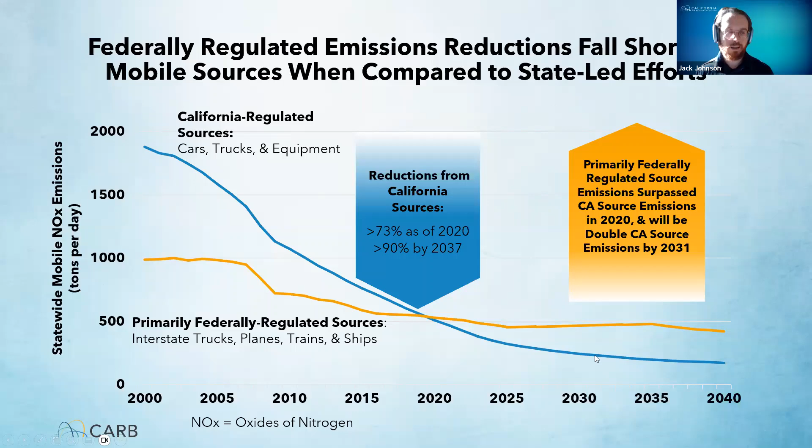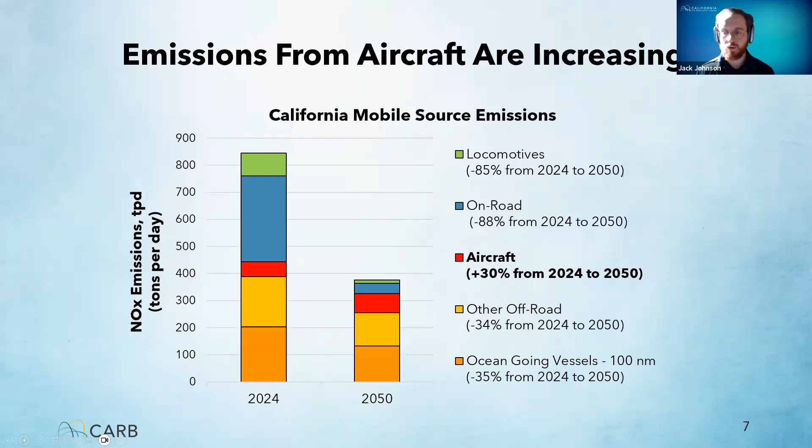The projected increase in emissions from aircraft is concerning, especially considering the NOx emission reductions needed to meet the targets outlined in the 2022 state SIP strategy. In the SIP, it's estimated that an 80% reduction in aviation emissions is needed to meet the 2015 ozone standards. This reduction in the South Coast Air Basin could solely be achieved by reducing commercial aircraft emissions, which make up approximately 90% of all aircraft NOx emissions there. This trend, both statewide and for the South Coast specifically, shows how there is a huge potential to reduce NOx emissions from commercial aircraft alone.

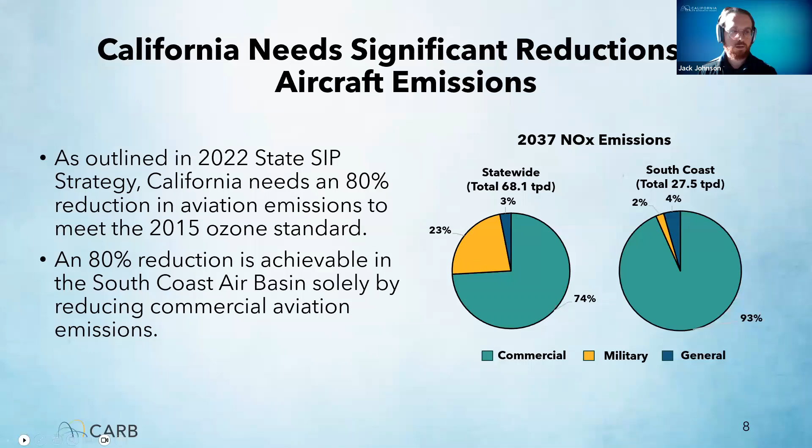CARB's 2022 scoping plan has also set aggressive emissions targets to achieve carbon neutrality for aircraft. Through the scoping plan, 20% of aviation fuel demand will need to be met either through electricity or hydrogen by 2045, with the remaining 80% met by sustainable aviation fuel, or SAF. These targets for the aviation sector will be crucial in reaching California's goal of carbon neutrality by 2045.

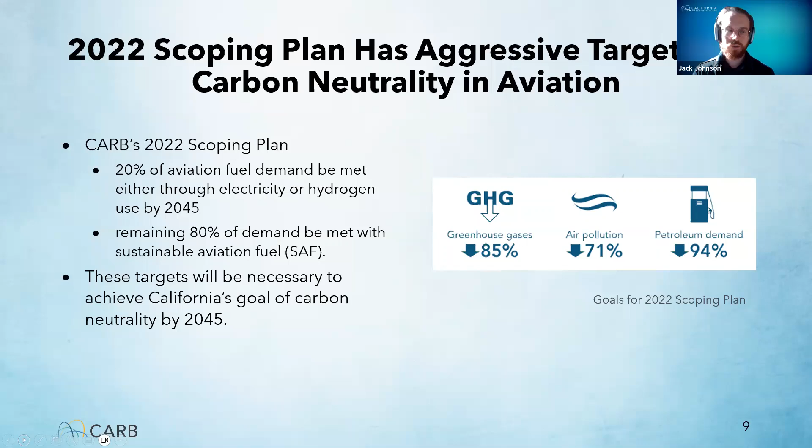There are many reasons why emissions reductions are important, with the most prominent being the health impacts of jet fuel to passengers, pilots, airport and ground support workers, as well as communities that live close to airports. Poor air quality has been linked to many health conditions, including decreased lung function, asthma, other respiratory illnesses, and premature death. These health impacts are caused both by burned and unburned jet fuel. A study done in 2021 by the National Research Center for the Working Environment in Denmark showed that jet engine emissions have similar physical and chemical properties, as well as health effects, to diesel particulate matter.

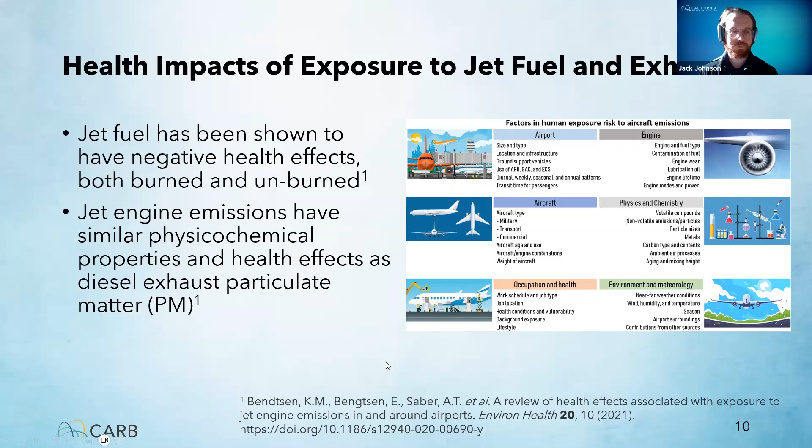Jet fuel emissions have been shown to affect the health of airport workers and nearby communities. A white paper released by SEIU in 2024 showed that airport workers can be exposed to particulate matter concentrations 6 to 9 times higher than concentrations measured on busy streets. Because of these negative health outcomes, airport worker unions have been strong advocates for emissions reductions in the aircraft sector.

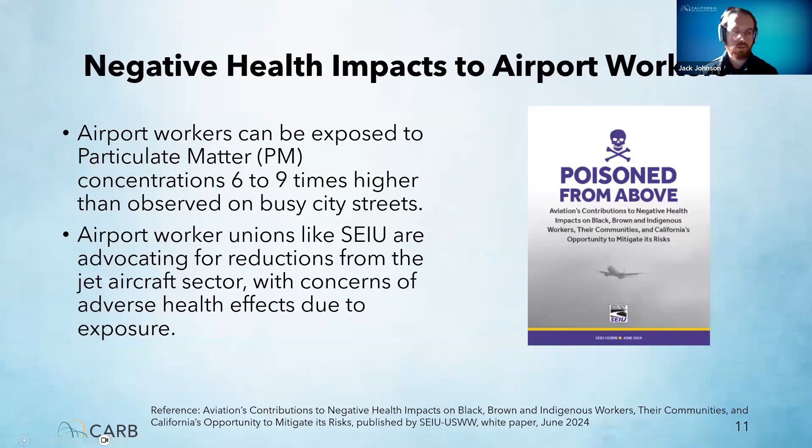In addition to high exposure levels in airport workers, a monitoring study conducted by USC in 2014 showed that particle number concentrations are 4 times higher, even 10 kilometers downwind of Los Angeles International Airport. Communities closer to the airport had measured particle concentrations as high as 8 times above background levels.

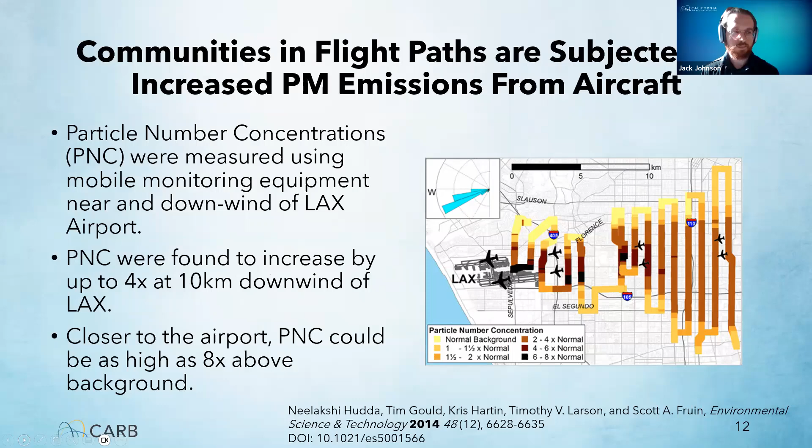Leaded aviation gasoline, or avgas, has also been a concern in recent years due to the potential for exposure to lead emissions. A recent endangerment finding from the EPA found increased concentrations of lead in children's blood who lived near airports, particularly those with higher general aviation activity. While leaded avgas is typically not used in commercial operations, it is still an air pollutant of concern from aviation.

In response to some of these findings, Senate Bill SB 1193 was passed in California to ban the sale and distribution of leaded avgas in California by 2031. Currently, there are 14 airports in California that offer the 94 octane unleaded avgas. However, only about 30% of general aviation activity can use the lower 94 octane fuel in their engines. There are now 2 airports in California offering 100 octane unleaded avgas, and this will cover the remaining 70% of general aviation activity in California.

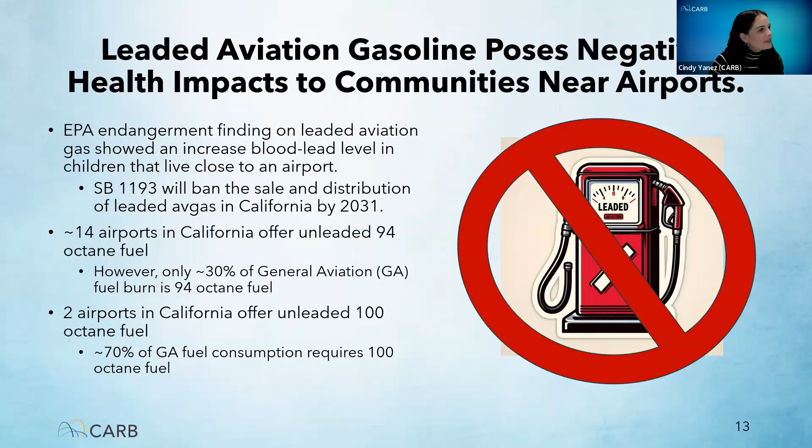The first standards were adopted in 1981 and included engine emission standards for NOx, CO, hydrocarbons, and smoke. Since then, the NOx standard was tightened four times, in 1992, 1998, 2004, and 2011, by 12 to 20% relative to the previous standard. In 2017, CAEP adopted the first emission standard for greenhouse gases, and in 2019 they established new emission standards for non-volatile PM.

While ICAO sets an international standard, US EPA is responsible for setting aircraft emission standards domestically. US EPA has authority to set stricter standards than ICAO, but traditionally harmonizes with the federal standards with ICAO. These emission standards are set under a technology-following approach rather than a technology-forcing approach. This means the standards can be met with technology that's already in use.

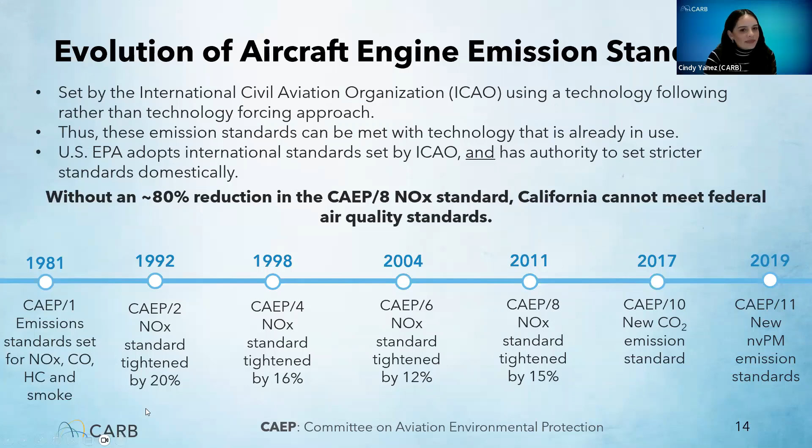The federal government has initiated some programs to help advance new aircraft technologies. FAA organized a cost-sharing program called the Continuous Lower Energy Emissions and Noise Program, or CLEEN, which aims to accelerate the maturation of new aircraft technologies. The program provides one-to-one cost matching with aviation industry companies who develop technology that reduces noise, fuel burn, or emissions below the CAEP standards. The goal is to incentivize development of new aircraft or engine technologies and alternative jet fuels that manufacturers may not have taken on otherwise.

In the current phase of the program, CLEEN 3, the goals are to reduce fuel burn by 20% relative to the CAEP 10 standard, NOx emissions by 70% relative to the latest standard, and non-volatile PM emissions lower than the CAEP 11 standard. The CLEEN 3 projects are ongoing right now until 2026, and the program targets to get these technologies into service by 2031. Several technologies from previous phases, CLEEN 1 and CLEEN 2, are already commercially available and in service today.

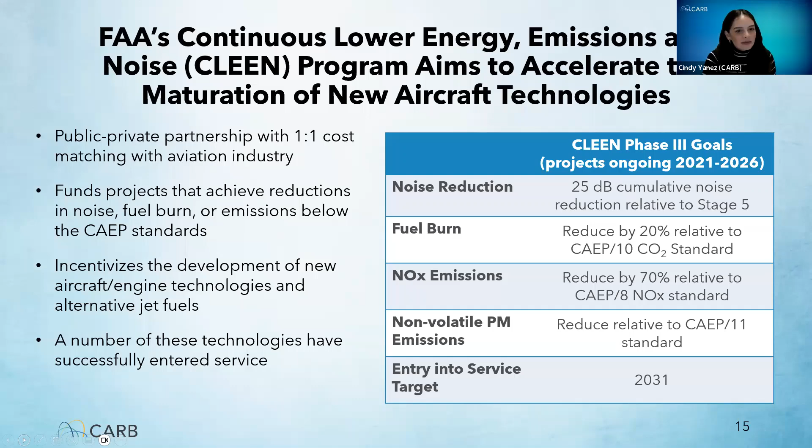A good example of a successful technology that came out of the CLEEN program is the twin annular premixing swirler, known as TAPS, which is a lean burn combustor developed by General Electric through CLEEN. Lean burn technology limits the conditions under which NOx is formed by lowering combustion temperatures, since NOx primarily forms under high temperatures, and by promoting a more thorough mixture of air and fuel before combustion through a swirling mechanism.

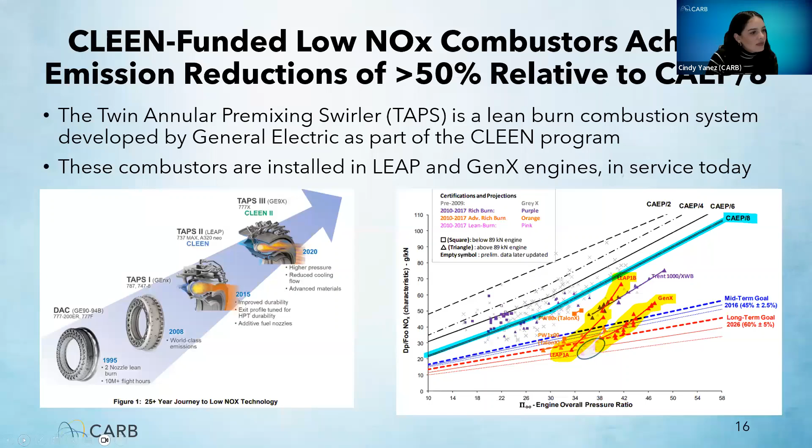This slow advancement toward lower NOx engines is also related to the trade-off between NOx emissions with fuel efficiency and also with noise mitigation. Simultaneous efforts for all three of those have resulted in a nearly flat trend for NOx. Although the NOx standard was tightened four times since the 1980s, this likely just prevented an increase in NOx emissions from fuel and noise reduction efforts over that time, but it did not reduce NOx.

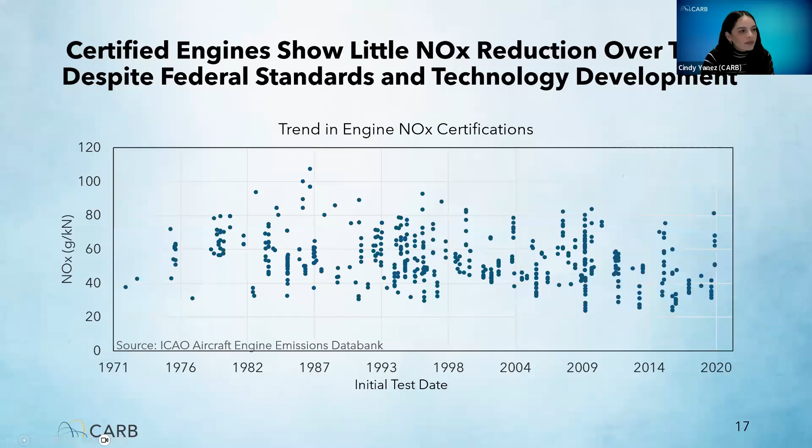Much of the aviation industry's current environmental efforts right now are focused on achieving net zero carbon targets by 2050. Plans to reach net zero rely heavily on the deployment of sustainable aviation fuel, or SAF, which significantly reduces CO2 emissions on a life cycle basis.

Just recently, CARB signed an MOU agreement with Airlines for America to further increase SAF use in the state. This MOU sets a target of working with the aviation industry to have 200 million gallons of SAF available in California by the year 2035.

While this target is a 10-fold increase over last year's volume, this amount is still less than 5% of the state's total jet fuel consumption. It is about 40% of jet fuel consumption for flights within California, but when accounting for interstate and international flights, this is still less than 5%.

Far more SAF is going to be needed for the aviation industry to meet the net zero carbon goals. Also, while SAF has significant benefits in reducing greenhouse gas and PM emissions, it does not reduce emissions of NOx or toxics, which are of high concern for air quality. Therefore, not only is more SAF needed, but more actions beyond just increasing SAF are needed.

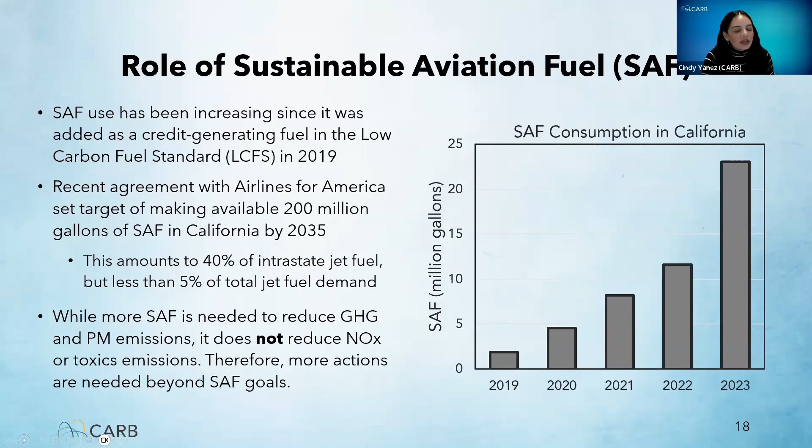Next. Air districts can establish local incentive and voluntary programs such as the MOU between South Coast and their five largest commercial airports. Air districts also have authority to create an indirect source rule for airports. On CARB's side, we can leverage our authority to establish statewide rules for operational practices, create incentive programs, and set emission reduction targets.

At the federal level, US EPA and the FAA are responsible for advocating and or setting tighter emission standards for aircraft engines, funding technology advancement through programs like CLEEN, and regulating safety, routes, and service. At the international level, ICAO's role is to set tighter international engine emission standards.

And then moving forward, airports can also take some action through their air quality improvement plans, infrastructure planning, and incorporating environmental initiatives into their lease agreements with their tenants, and by implementing local policies, for example, landing fees or curfews. And then next, the airlines could prioritize air quality in their operations and engage in opportunities to advance technologies and or operational practices.

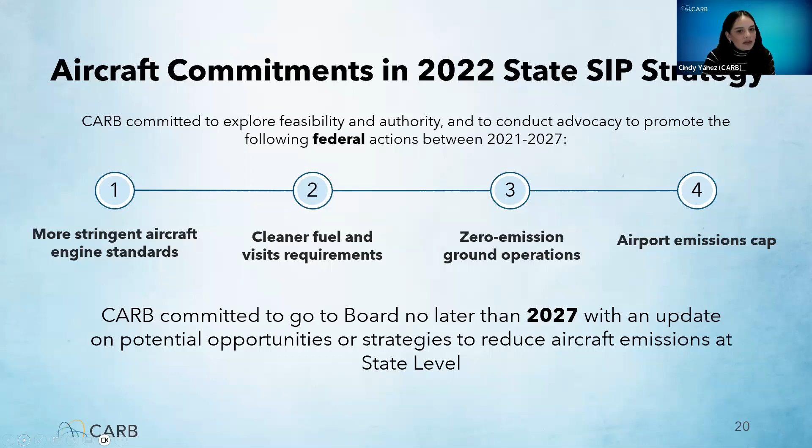As part of our efforts, we're conducting careful, in-depth analysis of our legal authority to promulgate rulemaking on emissions associated with aviation. Here we listed a few of CARB's responsibilities under the Health and Safety Code. First, CARB is directed to control criteria air pollutants from mobile sources to attain air quality standards. We're also responsible for reducing greenhouse gases to specific levels to combat climate change. The Health and Safety Code also permits CARB to assess fees to cover costs of compliance of off-road mobile sources. We will be cognizant of potential federal preemption issues throughout the rulemaking, and our legal team is carefully reviewing any possible limitations.

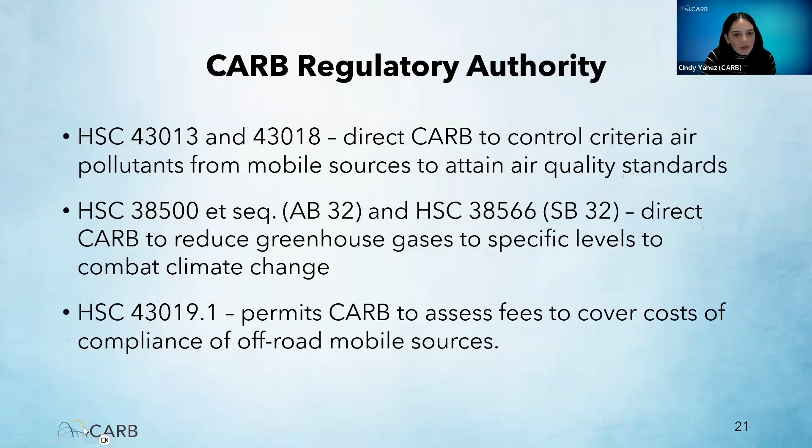Now I will pass it over to my colleague, Dr. Ramin Tohidi, so he will discuss more on existing state actions.

Thank you, Cindy. California has set key regulations to reduce emissions at airports. The large spark ignition engine (LSI) rule, starting in 2009, required large fleets to meet emissions limits for cleaner air. The in-use off-road diesel rule requires fleets to reduce emissions by retiring, replacing, repowering, or retrofitting older diesel engines from 2024, phasing out older diesel engines and mandating renewable diesel. The zero-emission forklift regulation, starting in 2026, requires only zero-emission forklifts, phasing out older ones by 2028. The airport shuttle bus rule transitions shuttles to 100% zero emission by 2035.

For vehicles, the Advanced Clean Cars 2 rule ensures all new passenger cars are zero emissions by 2035. The Advanced Clean Trucks rule increases zero-emission truck sales, while the Advanced Clean Fleet rule phases in 100% zero-emission government and drayage fleets by 2035. Then we have the recent partnership with Airlines for America, which aims to make 200 million gallons of sustainable aviation fuel (SAF) available in California by 2035. Lastly, based on the scoping plan, by 2045, 20% of aviation must be zero emission, with sustainable aviation fuels supporting the rest. Next slide, please.

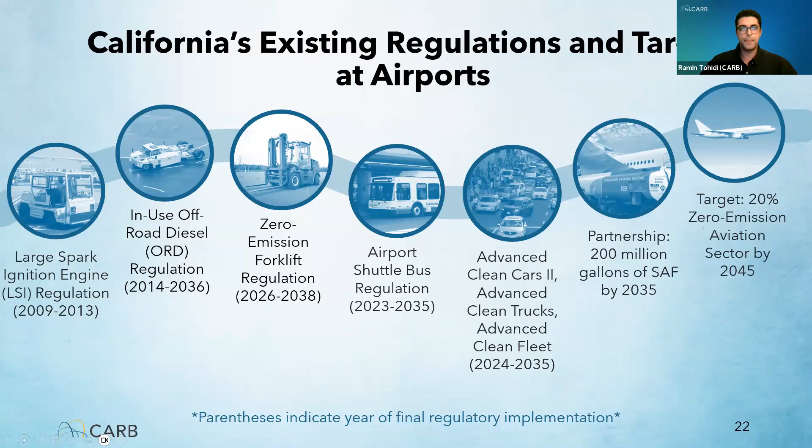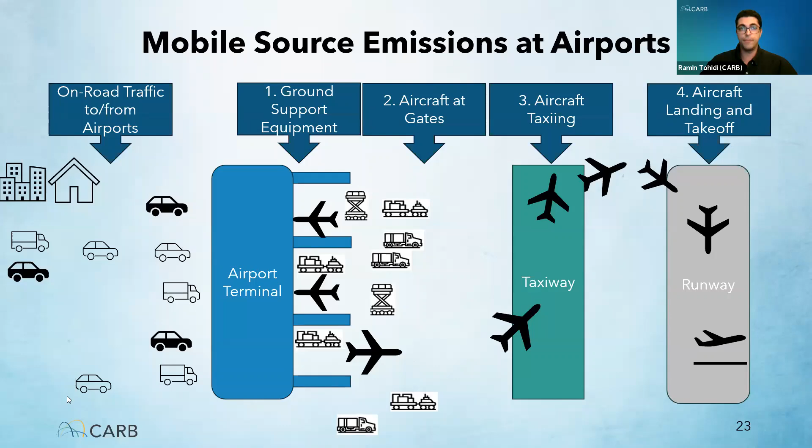This slide highlights the key sources of mobile emissions at airports. First, we have on-road traffic to and from the airport, including passenger cars, taxis, and shuttles. Inside the airport, ground support equipment like baggage tractors and fuel trucks contribute emissions near the terminal. Next are aircraft at gates, which emit while parked and using auxiliary power units (APUs). As aircraft move, emissions occur during taxiing on taxiways, and finally from landing and takeoff on runways. Each stage plays a role in overall airport emissions, and CARB is actively working to address emissions at every level. Next slide, please.

This slide focuses on NOx emissions at the airports and where they come from. First, on-road traffic like cars, shuttles, and taxis emit NOx through the combustion of gasoline, diesel, propane, and natural gas. Next, ground support equipment such as baggage tractors and fuel trucks adds to NOx emissions, specifically from older diesel powered machines. Aircraft at gates also contribute through auxiliary power units and idling jet engines, which emit NOx even when stationary. Finally, aircraft taxiing, landing, and takeoff are major NOx sources, with takeoff being particularly intense due to high fuel consumption. These stages highlight key areas where reducing NOx can have a big impact on air quality around airports. Next slide, please.

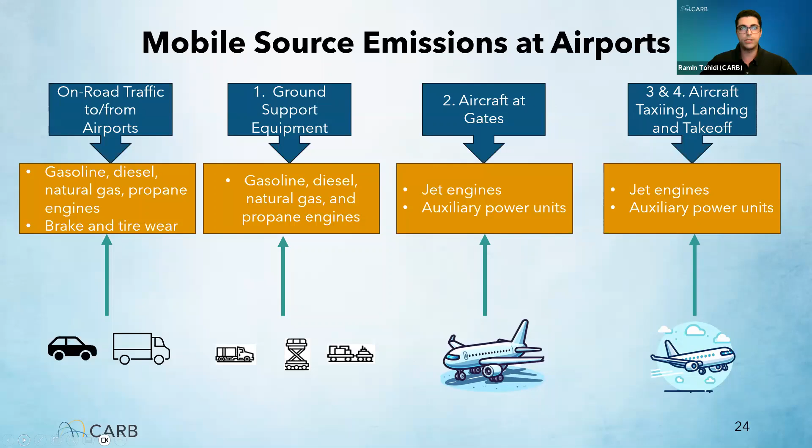This slide shows the contribution of mobile sources to NOx emissions at LAX in 2023. As you can see, aircraft are the dominant source, contributing 87% of the total NOx emissions. Breaking it down further, 81% of aircraft emissions occur during landing and takeoffs, staying within the nominal 3,000-foot mixing height, with 15% coming from taxiing and 4% from auxiliary power units. The remaining sources are on-road traffic, contributing 10%, and ground support equipment, which adds 3%. Next slide, please.

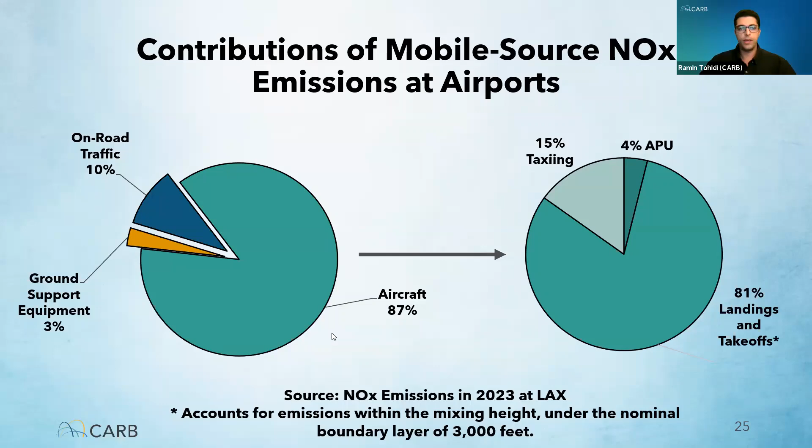How are these NOx emissions being addressed and regulated? For the 87% contributed by aircraft, there are no CARB regulations or technology forcing standards in place to directly control these emissions. The 10% from on-road traffic is targeted through regulations such as ACC2, ACT, ACF, and zero-emission shuttle bus rules, which aim to transition vehicles to zero-emission alternatives. And finally, the 3% from ground support equipment is partially regulated under the ORD and LSI rules.

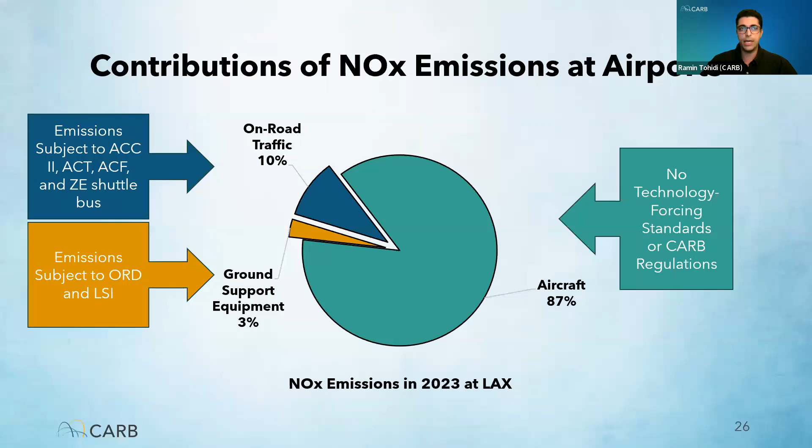The purpose of today's workshop is threefold. First, we'll introduce draft regulatory approach concepts, providing an overview of potential strategies for reducing emissions. Next, we'll outline planned updates to the emissions inventory, focusing specifically on aircraft and ground support equipment. And finally, we aim to collect your initial feedback on these concepts and explore possible alternatives.

As we present these concepts, we want to emphasize that these are just ideas and concepts at this stage. We don't have specifics yet. We are sharing these now to gather your thoughts and feedback. These are just concepts and ideas. We are here to explore possibilities and hear your reaction. We know there may be big questions about how these concepts would apply, and that's exactly the kind of input we are looking for today.

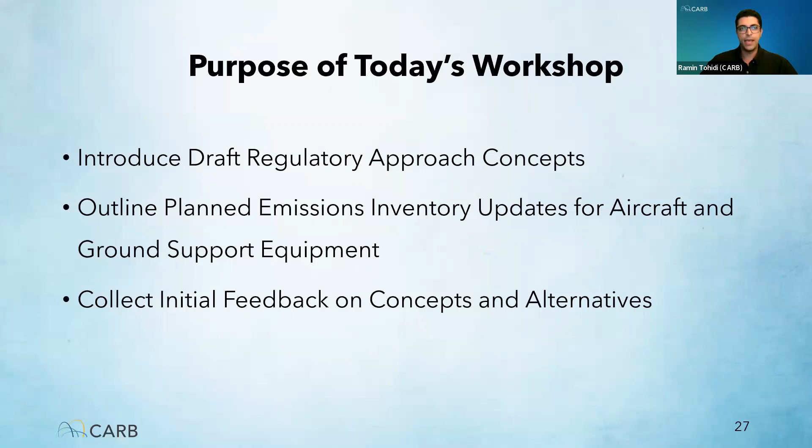Next slide, please. Okay, now I'll turn it over to Dr. Johnson to walk us through the details of our concepts. Yeah, thanks, Ramin.

For the next section of our presentation, we will be introducing our 4 concepts as part of this process. We would like to emphasize that these are just concepts and ideas that we have developed to reduce emissions from aircraft operations. The first of which will be ground support equipment. Next, we will discuss aircraft operations at the gate. Following that, we will discuss aircraft taxiing. And finally, our last concept involves emissions reductions from takeoffs and landings. We'll likely continue to change and adapt these concepts throughout these future workshops and encourage all feedback that you may have.

To start off, I wanted to give a quick high-level definition of airport ground support equipment, or GSE. Airport GSE includes all motorized equipment used on airside surfaces such as tarmacs, aprons, and taxiways, and they're used to support aircraft, passenger, and cargo operations, as well as other general airport ground functions. This equipment can be aggregated into 3 high-level categories shown on the right, including tugs and tractors, specialized trucks, as well as loaders and other on-site equipment.

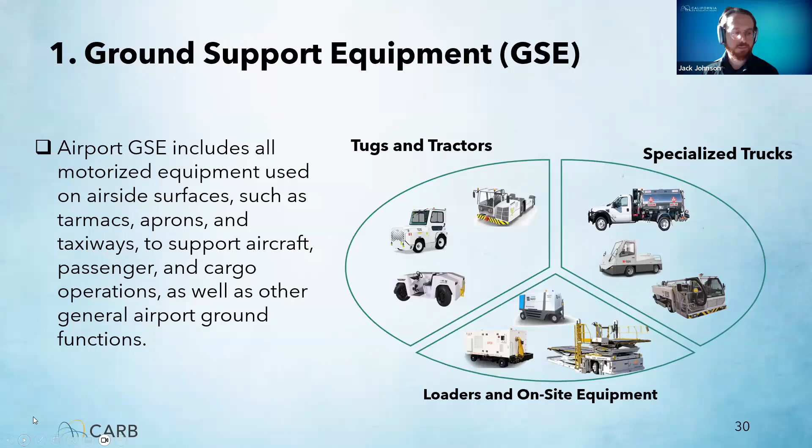For the GSE portion of our concepts, our draft concept would be to transition all GSE fleets in the state of California to 100% zero-emission GSE. This could include technologies such as electric GSE or fuel cell electric GSE. Many of the categories of GSE already have zero emission options on the market that have been proven to be operationally feasible and are used in fleets currently. Statewide, we've estimated that GSE fleets are approximately 22% zero emission as of 2022.

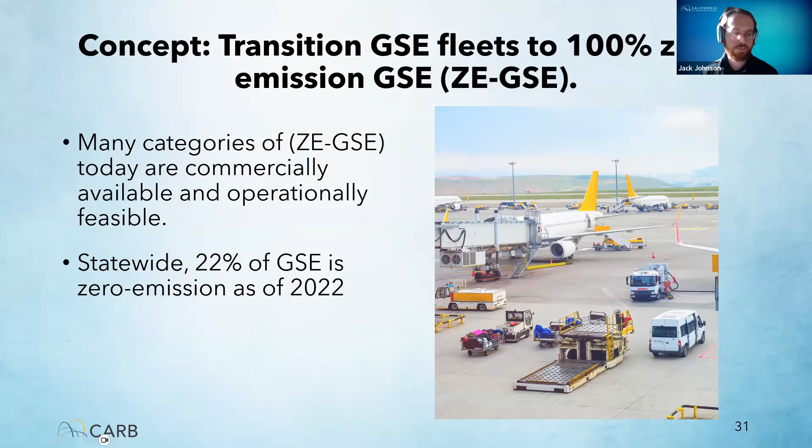Currently, there are no regulations that directly address emissions from airport GSE. However, some GSE are subject to CARB's LSI and ORD regulations that have set fleet average emission targets that cover gasoline and diesel GSE. Additionally, the South Coast Air Quality Management District developed an MOU with 5 major airports in the South Coast Air Basin in order to reduce NOx emissions from GSE.

Los Angeles International Airport, or LAX, has worked with their airline tenants and developed an agreement that all GSE at LAX shall be zero emission by 2033, unless exempt or no zero emission option is commercially available or operationally feasible. This could include, but is not limited to, fuel trucks, lavatory trucks, bobtails, air conditioners, GPUs, and all other GSE equipment categories that will be discussed in the second half of this presentation. LAX's program also has a few milestones along the way, including that by 2028, all GSE added to LAX shall be zero emission. And by 2030, all carts, baggage tractors, tugs, belt loaders, and aircraft tractors and tugs shall be zero emission.

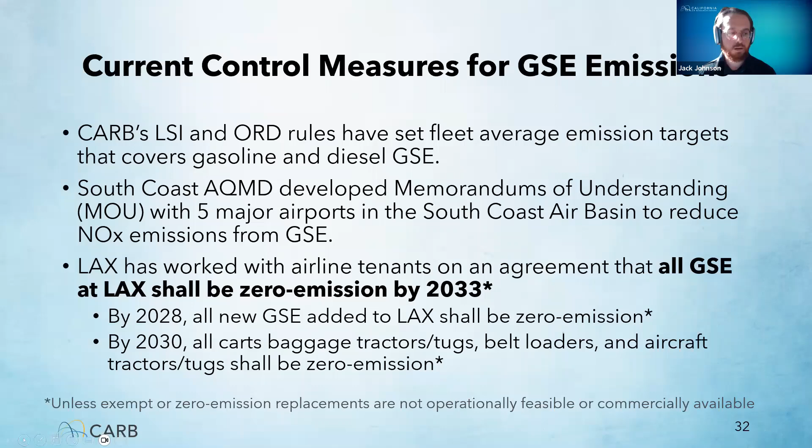We would like to solicit any feedback on the GSE portion of this regulatory work. Included here are some starting points and suggestions for feedback that would be helpful, but all feedback is welcome. Specifically, we would like to ask if there are any GSE operators, what are some of your biggest hurdles with using electric GSE? For GSE manufacturers, are there any pieces of equipment that will be harder to offer zero emission options? And if so, why? Airport infrastructure for charging GSE, what planning needs to be done for this infrastructure? And is this for both airports as well as GSE operators? Finally, any suggestions on implementation timeframes and approaches for achieving a zero emission fleet would be greatly appreciated.

And I will now pass it to Cindy Yanez to discuss aircraft operations at the gate.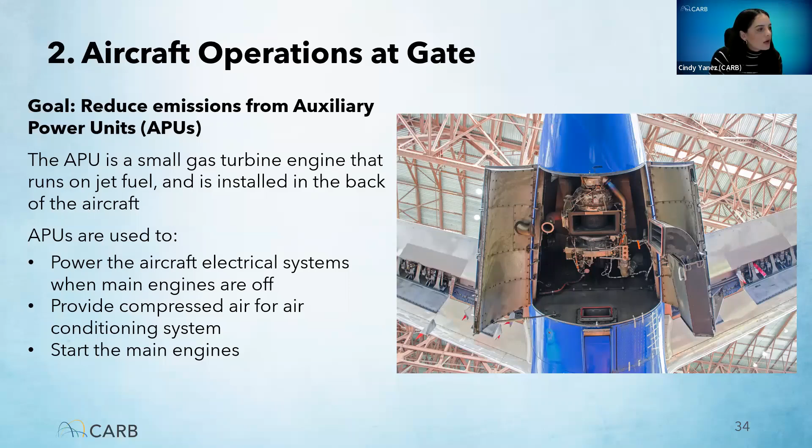When aircraft are parked at the gate and the main engines are shut off, the APU is used to power the aircraft electrical systems, such as navigation systems and onboard electronics. It also provides compressed air for the air conditioning systems to maintain comfortable conditions during boarding and pre-flight procedures, and provides pneumatic power to start the main engines once the aircraft is ready for its next flight.

This regulatory concept would require aircraft operators to plug into electrified gates instead of running the APU. Many airports already provide access to ground power and preconditioned air at their gates, providing a practical alternative to running the APU. This diagram shows an aircraft parked at an airport gate.

The APU, on the right, is usually used to provide power for the onboard electrical systems and bleed air for the air conditioning while producing emissions. However, instead of running the APU, this concept would require the aircraft support crew to plug the aircraft into gate power shortly after arrival, and connect the preconditioned air supply to provide heating or cooling services. The APU would be shut off for as long as possible during boarding and pre- or post-flight procedures, until the aircraft is about to depart and needs to start the main engines.

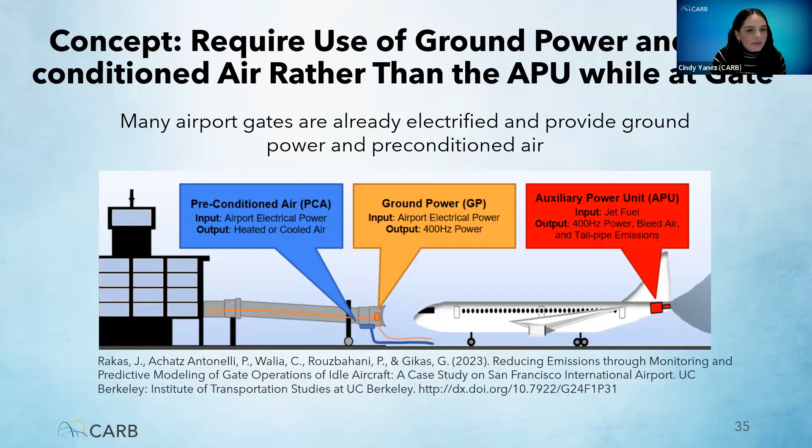Based on current data, we estimate that the APU is typically run for 42 minutes per turnaround operation - that is 21 minutes per arrival and 21 minutes per departure - assuming turnarounds take on average 72 minutes.

Studies suggest that even when airport gates are electrified, a portion of operations do not use ground power. A study at San Francisco Airport found that 36% of operations do not use ground power at all, and for the ones that do, they used it for an average of about 63% of their turnaround time.

This regulatory framework would try to maximize use of ground power wherever possible. Some airports, such as San Francisco and Fresno, have already set APU usage restrictions at gates and imposed fees on tenants for violations. Some European airports also have APU restrictions, such as Schiphol Airport, where APU usage is restricted to 5 minutes after arrival and 5 minutes before departure.

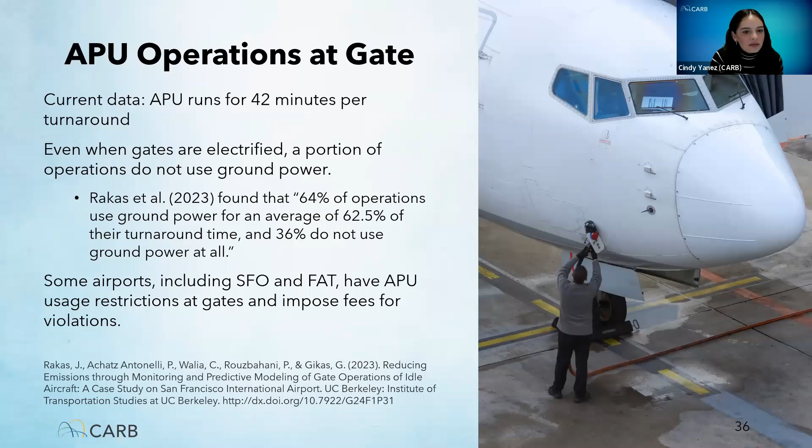As we are in the early stage of developing these regulatory concepts, we would welcome any feedback you have. For some starting points, we're interested in learning more about the maximum time frame that ground power and preconditioned air can be used instead of the APU.

We've been in discussions with several airports, and we've heard that most airports are fully equipped or nearly fully equipped with electrified gates and provide ground power and preconditioned air to their tenants. We would like to know if there are any airports where that's not the case, and about plans or pathways toward gate electrification. We'd also like your input on cases when there should be exceptions to APU usage restrictions, timeframes for implementation, and any other potential strategies for reducing emissions from gate operations.

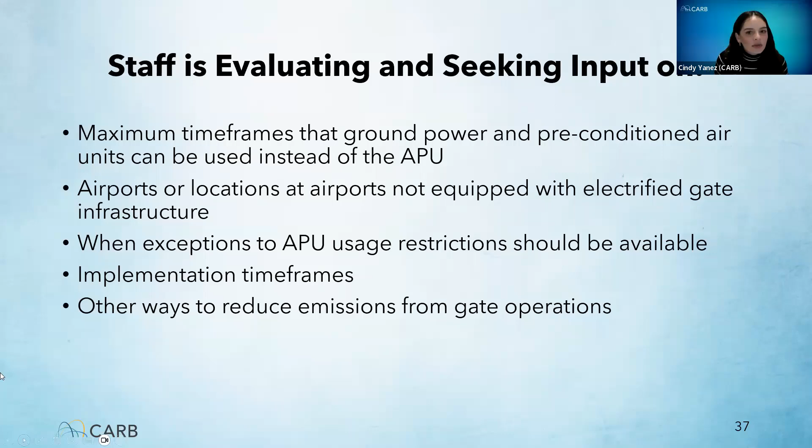I will now pass it over to Dr. Lucas Algrim to discuss the next regulatory concept.

Thanks, Cindy. The third part of our rulemaking will focus on taxiing emissions. During aircraft taxiing operations, pollutants are primarily emitted from the aircraft's engines, so the goal here is to minimize aircraft engine use while taxiing, either by using zero-emission technologies such as TaxiBot or WheelTug, or other low-emission strategies such as single-engine taxiing.

While it's not uncommon to use other tug technologies to taxi aircraft without passengers, for example to and from hangars for storage or maintenance, the technologies and strategies discussed here can be further used to taxi aircraft with passengers to and from runways.

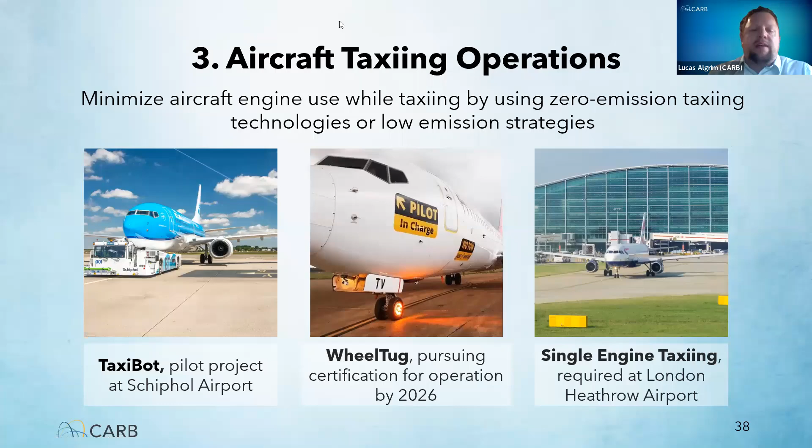Technologies that are commercially available for zero-emission taxiing can generally be split into two categories: external tugs and onboard electric systems. An external tug, for example TaxiBot, connects to the front wheel of the aircraft and pulls the plane forward.

TaxiBot has diesel hybrid designs already in use at airports in other countries, but also has battery electric models now available for order, as well as hydrogen-powered models under development. A key distinction about TaxiBot relative to other long-distance tugs is that it can be driven by the aircraft pilot from the cockpit, enabling it to be used to taxi loaded aircraft to and from runways.

Onboard electric systems, for example WheelTug or eTaxi, are onboard technologies that use electric motors to power the wheels of the aircraft. However, the electricity used is provided by the onboard APU.

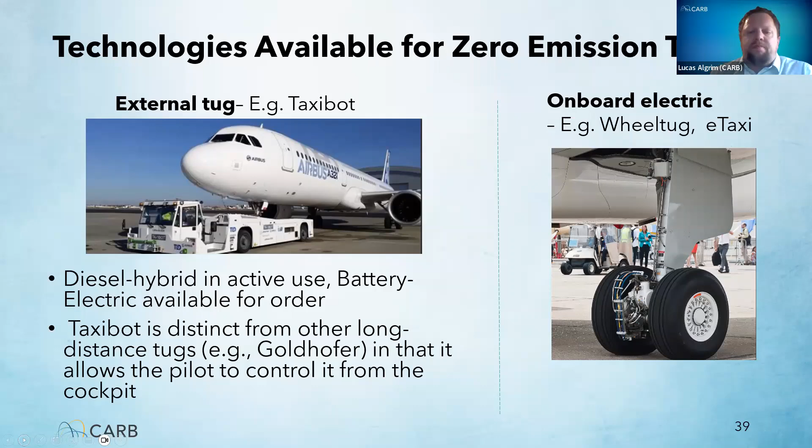So, what would taxiing using zero-emission tugs, such as TaxiBot, look like for a passenger-filled aircraft? When an aircraft lands, once off the runway and in a safe location, it can power down its engines, and the zero-emission tug connects to the front landing gear. The zero-emission tug then taxis the aircraft to the gate at the terminal.

For departing flights, a zero-emission tug has the advantage that it can replace a conventional pushback tug. It connects to the aircraft at the gate, pushes it back, and then can immediately taxi out with air traffic control approval. Near the runway, the tug disconnects from the aircraft as its engines warm up in a safe location and prepares to take off.

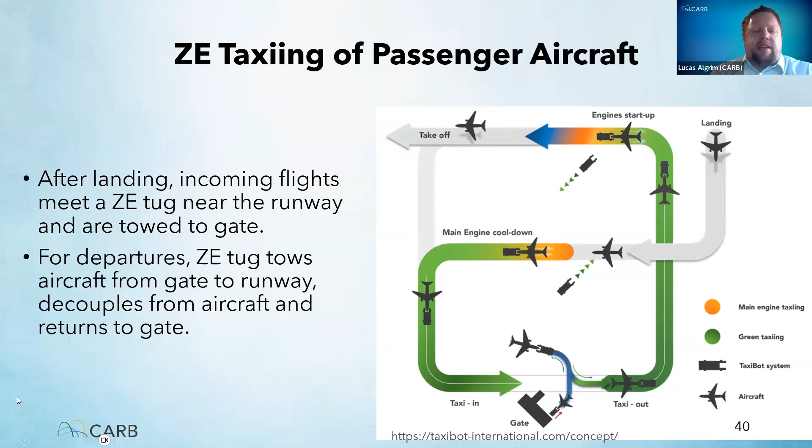Today in California, non-taxibot tugs are being used to move empty aircraft without powering up the aircraft engines between hangars and terminals. But these movements can include using taxiways and even crossing runways.

Taxibot technologies have been deployed in several international locations. Trials have been carried out with diesel hybrid taxibots at airports in Europe, such as Frankfurt Airport in Germany and Schiphol Airport in Amsterdam, and are more permanently implemented at Delhi and Bengaluru airports in India, where over 5,000 successful aircraft movements have been performed.

Taxibot demonstrations have shown that even though using the technology can be logistically challenging, there are promising implementation scenarios. The largest emissions and cost benefits come from longer distance taxiing scenarios, and spacious taxiways and service roads can further allow for an easier initial implementation.

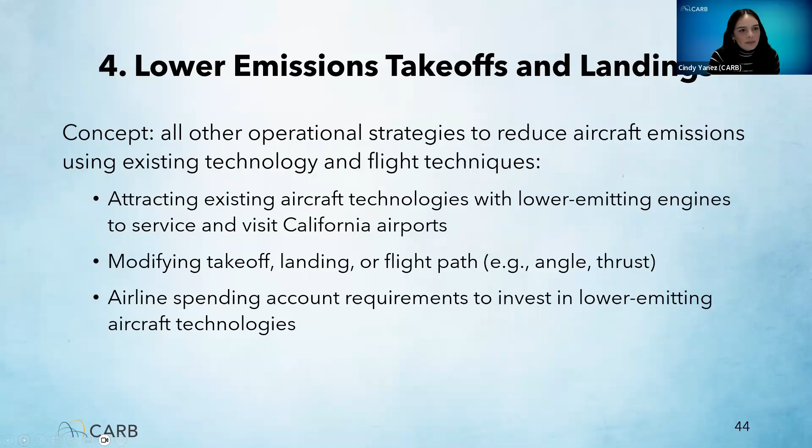For the first idea, aircraft operators would use takeoff and landing techniques known to reduce NOx emissions near the ground. Starting with landings, continuous descent approaches are a landing technique where the aircraft gradually descends down to the runway in a smooth, continuous fashion, instead of in step stair segments facilitated by air traffic control. So instead of going down like a staircase, the aircraft descends like a ramp. This reduces both NOx and fuel consumption because the aircraft is able to descend using low thrust, near idle settings, and minimize bursts of acceleration and deceleration.

To our knowledge, continuous descent approaches are already used regularly, so we think this technique is mostly resolved, which is great, since this approach is a win-win for several factors, including emissions, noise, and fuel use. But we would like to learn more about situations when it's not used and if there's room to optimize it to further achieve emission reductions.

Secondly, we listed using optimized approach angles during descent, which could also reduce NOx by reducing fuel use and completing the descent more quickly. And then for takeoff strategies, using derated takeoffs could also significantly reduce NOx emissions. This would entail not applying full thrust during takeoff and instead using lower power settings. Some studies have shown that this reduces NOx emissions by 10 to 48% relative to using 100% thrust.

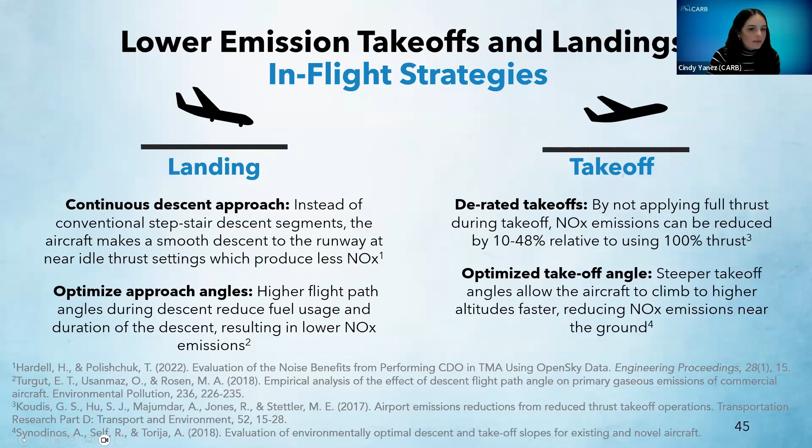Moving to the second idea of this concept, which we call cleaner visits. As mentioned earlier, some aircraft have already incorporated lower emission technology. We conducted analysis using the ICAO emissions data bank, which includes reported emission certification data for aircraft engines. We match the engines to the aircraft they are used in based on activity data in our aviation inventory, then took a weighted average of the NOx certification values of the engines used in each aircraft to determine which aircraft have the lower NOx emitting engines.

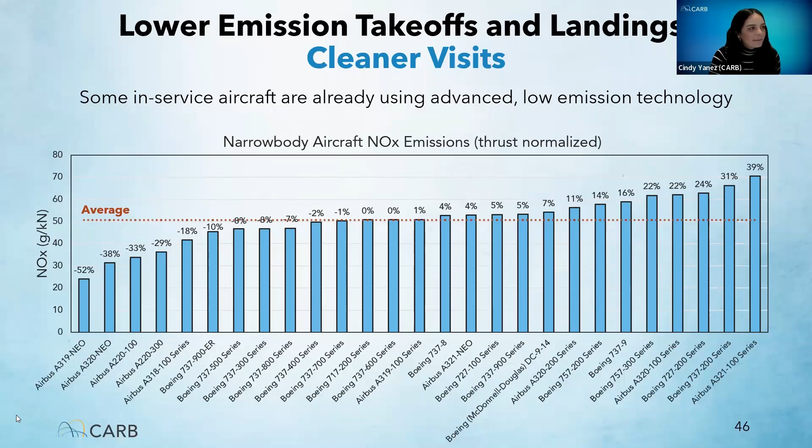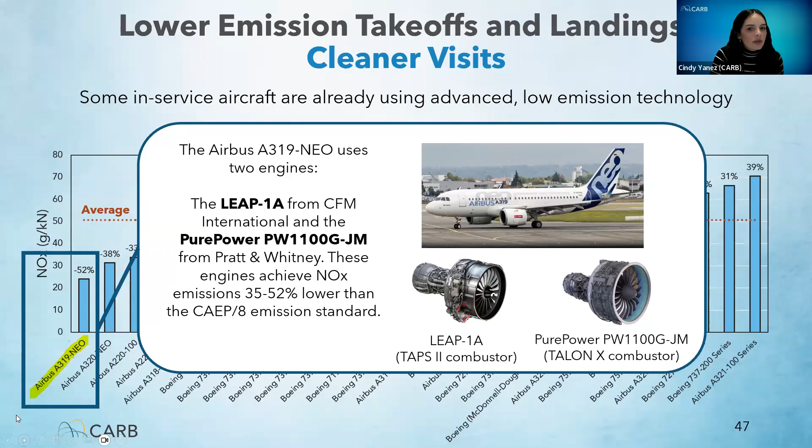As an example, I'm zooming in here to the Airbus A319neo aircraft, which we calculated to have the cleanest engines. It uses two engines, the LEAP 1A from CFM International and Pratt & Whitney's Pure Power PW1100G JM series. As mentioned earlier, the LEAP engine has a TAPS 2 lean burn combustor developed with the FAA's CLEEN program. This specific version achieves NOx levels 52% lower than the CAEP 8 standard. The Pratt & Whitney engine uses a different combustor called the Talon X, which uses advanced rich quench lean combustion technology, and achieves emission reductions of 35% lower than the standard.

This analysis shows that moving towards lower NOx emitting aircraft by encouraging clean aircraft visits can be achieved now with existing commercial technologies. Significant emission benefits could be seen simply by encouraging visits from existing aircraft with cleaner engines that are already commercially available and in service. If we couple this idea with having those clean aircraft use SAF, then benefits for both NOx and PM could be achieved.

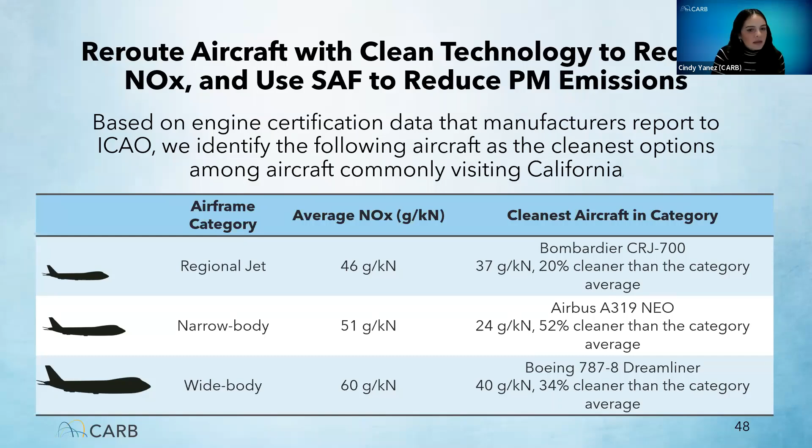The final idea for this regulatory concept would be to establish emissions reduction spending accounts for airlines. The program would require airlines to create an account and deposit funds that they would use to invest in zero emission or lower emission aircraft. The amount each would deposit would be determined based on various factors such as their level of activity or total emissions in California. Then the funds they accumulate would be used to purchase cleaner technology to incorporate into their fleet.

We welcome any feedback you have on this concept, such as what would be a good structure and time frame for a spending account program, and which factors could be considered for determining the contributions. For example, it could be based not only on total emissions or activity, but higher contributions could be required if the activity patterns create heavier emission impacts on disadvantaged communities.

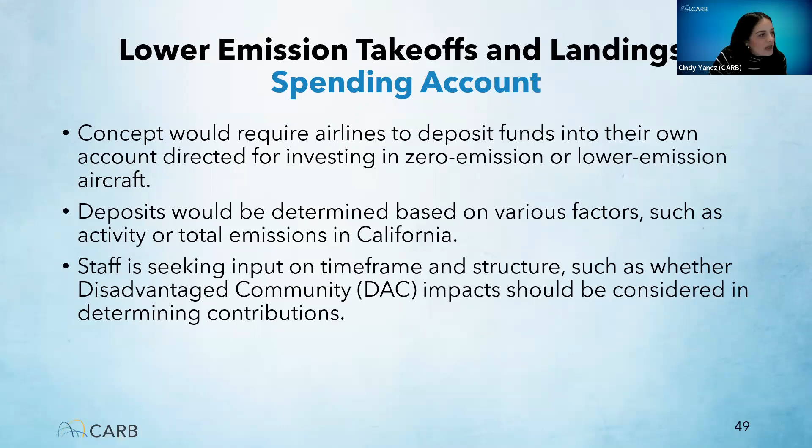That concludes the fourth regulatory concept ideas. As with the other sections, we would love to hear your input and have listed some specific questions or interests. Specifically, we'd like to learn more about how frequently some of these operational strategies we mentioned are already used.

Our current understanding is that continuous descent approaches are done regularly, but we'd like feedback about situations when it is not used. Ideally, any data would be helpful about the number of operations that use continuous descent approaches or other innovative approach techniques. And if there are other operational strategies to reduce aircraft emissions during takeoffs and landings that we did not mention, we would also like to hear about those.

Also, we'd like to learn more about how specific aircraft are routed to different airports, and what would be the logistics and feasibility of rerouting aircraft so that those with existing cleaner technologies can service priority areas in California.

Perhaps it would be an economic measure, such as differentiated landing fees, like what is done in some airports internationally, where there would be higher landing fees for aircraft with higher emissions. A measure like this would likely involve intrastate cooperation between airports, and that would need cleaner visits more than others.

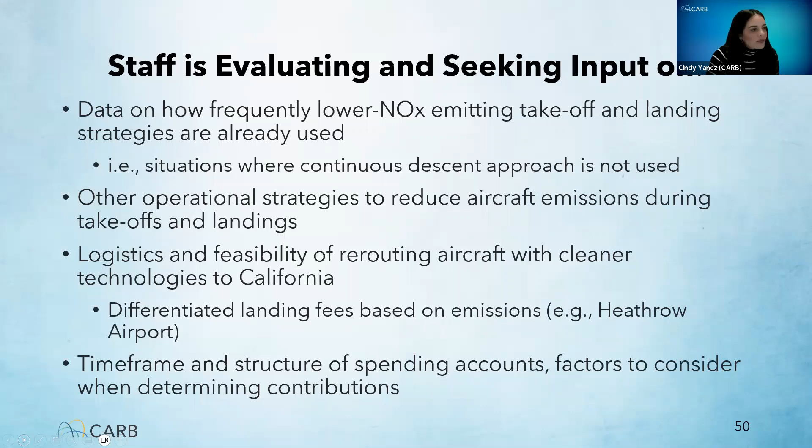And lastly, we'd like your input on what would be a feasible time frame and structure for a spending account program, and which factors we should consider when determining contributions. Now I'll pass it back to Mo, who will facilitate the Q&A session.

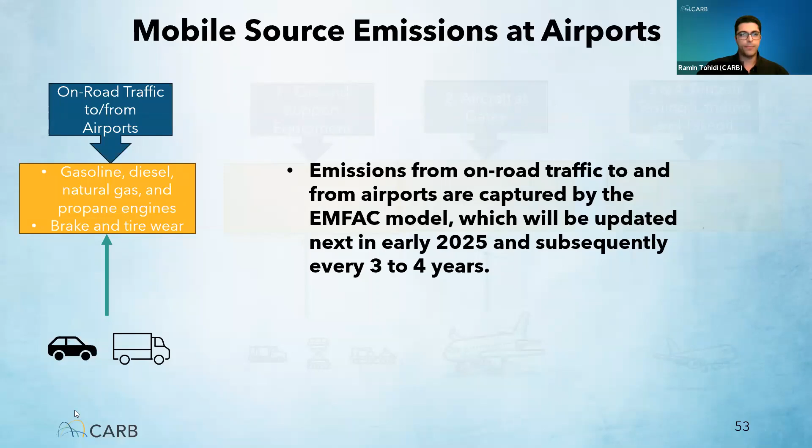Building on the previous slide, where we focused on on-road traffic emissions, let's now look at emissions from ground support equipment, or GSE. These emissions, which primarily come from gasoline, diesel, propane, and natural gas engines, are now being independently captured in a statewide inventory model under development. This approach separates GSE emissions from broader categories, providing a more detailed and accurate representation of their impact. By distinguishing GSE emissions, CARB aims to better understand and address the specific contributions of these vehicles to overall airport emissions.

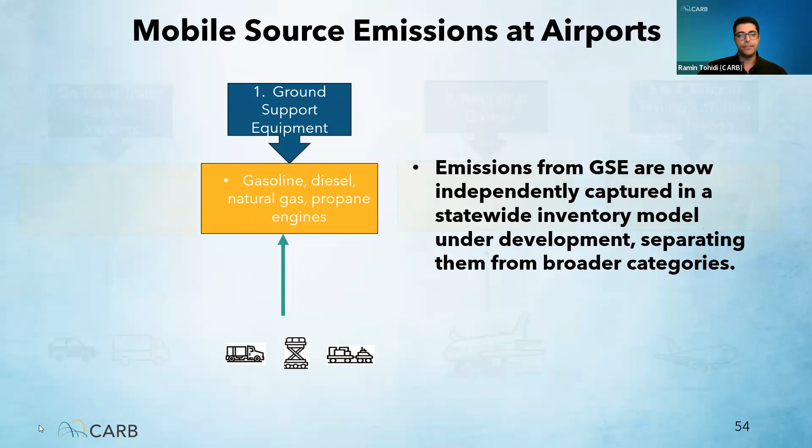Next slide, please. Emissions from aircraft at gates and during taxiing, landing, and takeoffs are captured by the California Aircraft Inventory, or CAI model, developed by CARB. These emissions originate from two primary sources: jet engines and auxiliary power units, also known as APUs. The CAI model ensures that emissions from these specific sources are accounted for separately, offering a comprehensive understanding of their environmental impact during various stages of aircraft operation. In the next slides, my colleague Dr. Algrim will delve into more details about the CAI inventory.

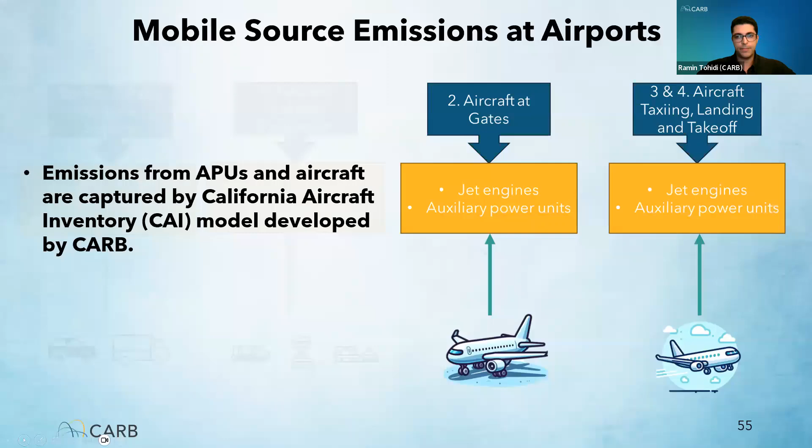It's you, Doctor. Next slide, please. Thanks, Ramin. The new statewide California Aircraft Inventory, or CAI 2024 for short, is an inventory model that captures statewide aircraft activities, which excludes GSE activity. Based on that aircraft activity, it estimates aircraft emissions.

The model includes all major types of aircraft, such as commercial, general aviation, agricultural, rotorcraft, and military. The emission estimates are based on flight activity and fleet mix and is ultimately constrained by the LTO cycle, which is defined by a mixing height. The final version of this model should be released by the end of this calendar year, 2024. If you'd like to learn more details about this model than what we provide here, there is a link on this slide that'll take you to a recent workshop in October that was entirely devoted to this model. Next slide, please.

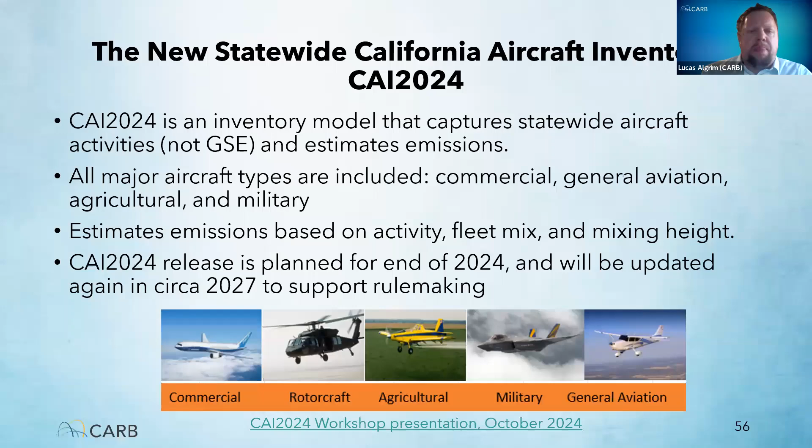As mentioned, the LTO cycle is constrained by mixing heights, which is the height above the ground surface at which a pollutant can be readily dispersed by turbulent mixing of the atmosphere. Once an arriving aircraft has descended below the mixing height, it has officially begun its LTO cycle. The aircraft touches down on the runway, slows to taxiing speeds, takes the taxiways to the airport gates. After unloading and reboarding passengers, the aircraft taxis back to the runway and takes off. Once the aircraft has climbed to an elevation above the mixing height, it has officially ended its LTO cycle.

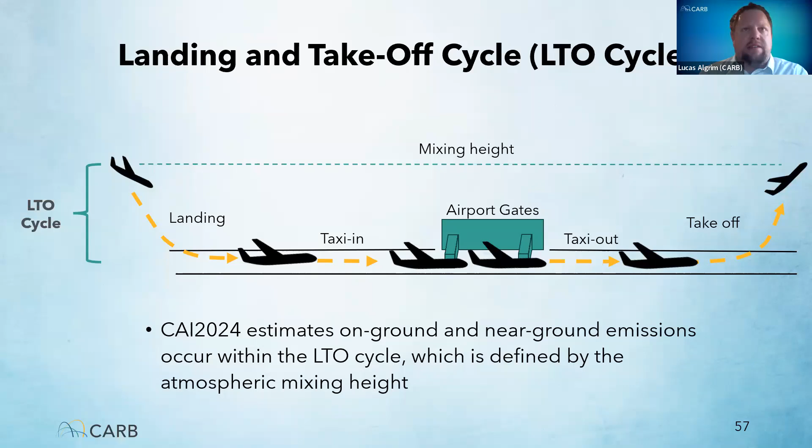Next slide. Here we'll discuss some of the specific parameters used in the CAI 2024 model. The federal SIP conformity rules specify emissions up to 3,000 feet can be considered in the absence of region-specific analysis, but CARB staff determined airport-specific mixing heights based on AERO5 data. The airport-specific values can vary greatly, but they generally fall on average around 3,000 feet.

CARB staff determined that on average, taxi-in times are about 6 minutes and taxi-out times are a little over 15 minutes, but these can vary from airport to airport. It was estimated, as Cindy had mentioned previously, that 42 minutes of APU usage are needed for all flights at all airports in California.

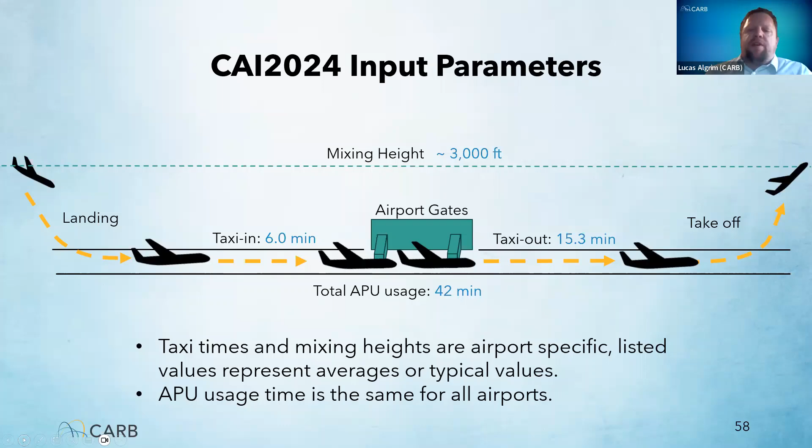Prior to this model, regional air districts prepared aircraft inventories, but moving forward, CARB will prepare the aircraft emissions inventories within the CAI 2024 model to ensure statewide consistency. CARB will be evaluating and, if needed, updating the CAI 2024 model before finalizing the rule proposal in 2027.

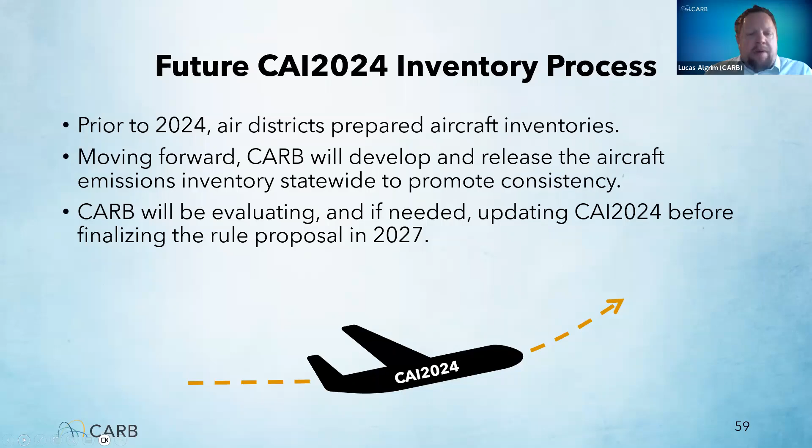And with that, I'll hand it back to Dr. Ramin Tohidi to discuss the statewide GSE inventory. Thank you, Lucas.

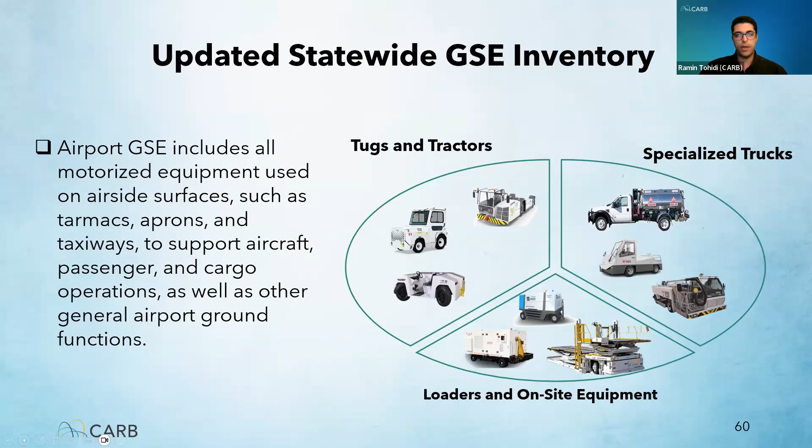As we discussed, airport GSE includes motorized vehicles used on airside areas like tarmac and taxiways to support aircraft operations. These range from tugs and tractors for towing to specialized trucks like fuel and catering vehicles, and loaders for cargo handling. GSE plays a vital role in ensuring efficient and safe operation, from fueling planes to managing luggage and cargo, keeping airports running smoothly.

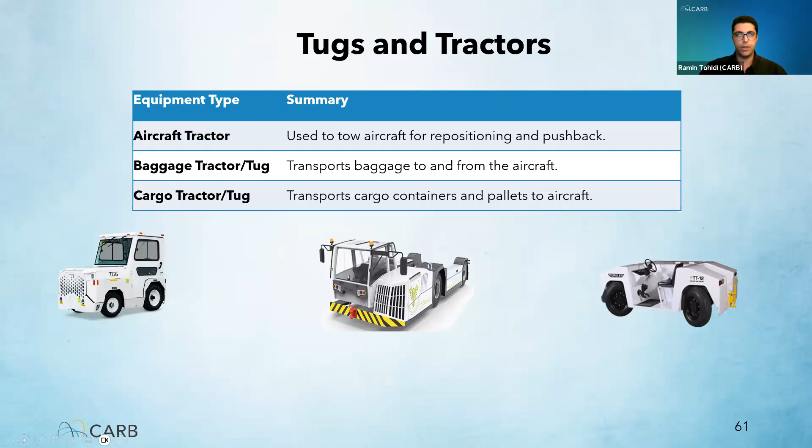Tugs and tractors make up about 40% of the total GSE at airports statewide. Aircraft tractors are essential for pushback and repositioning, while baggage tractors are used for routine baggage handling. Baggage tugs can be used interchangeably with baggage tractors, handling heavier duty tasks. Cargo tractors, on the other hand, are used to move cargo containers and pallets. Together, these vehicles play a key role in keeping airport operation running smoothly.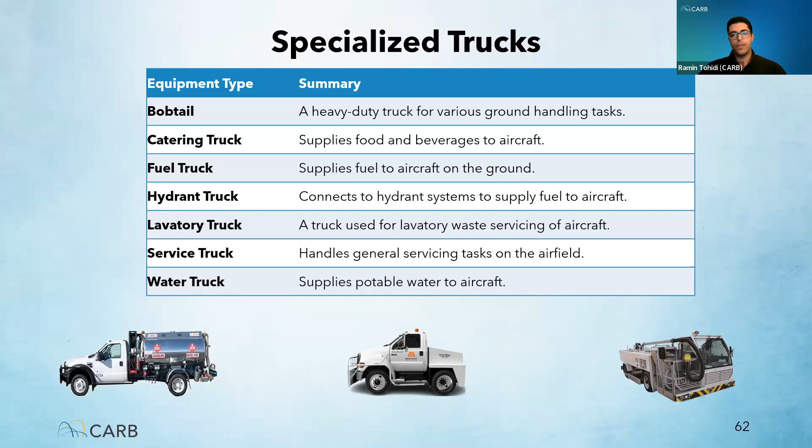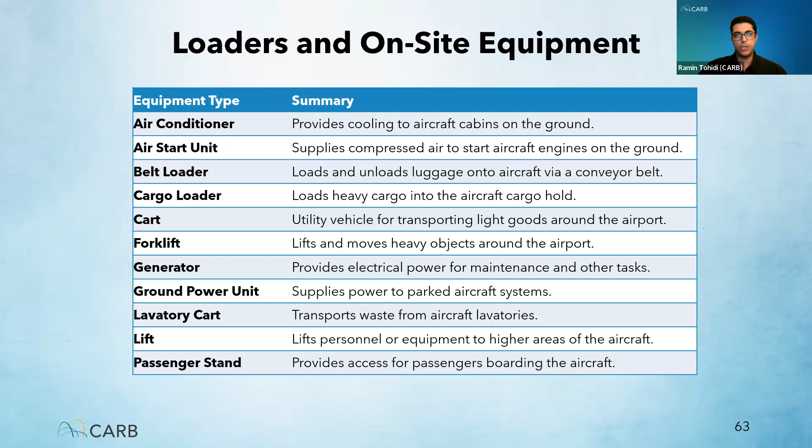Loaders and on-site equipment account for about 40% of the total statewide ground support equipment at airports. Loaders handle tasks like loading luggage, cargo, and personnel. For example, belt loaders are used to move luggage onto aircraft, while cargo loaders handle heavier items. Lifts and passenger stands provide access to aircraft for passengers and crew. On-site equipment like air conditioners, air start units, lavatory carts, and generators have their own engines, but typically need to be towed between locations.

Okay, let's discuss the current regulations on GSE. As we discussed, these regulations fall mainly into two frameworks. First, the large spark ignition engines, or LSI fleet rule, which addresses equipment types using spark ignition engines, commonly fueled by gasoline or propane. The second key framework is the off-road in-use diesel rule, or ORD. This one targets diesel-powered GSE that generally has a higher emission profile.

For LSI, the reporting requirements through the DOORS program ended in 2023. For the ORD fleet rule, there's a structured reporting schedule based on fleet size. Large and medium fleets have been required to report emissions data annually since 2016, with reporting ending in 2023, while small fleets started reporting later in 2018 and will continue until 2028. After these deadlines, any fleet failing to meet its final emissions targets must continue reporting annually until compliance is reached.

However, with the reduction in direct reporting checks for both LSI and ORD fleets, there could be an impact on future tracking and compliance processes for GSE. Due to these checkpoints, it's become necessary to adjust the population database reported through the DOORS system, focusing specifically on GSE at airports to address any gaps.

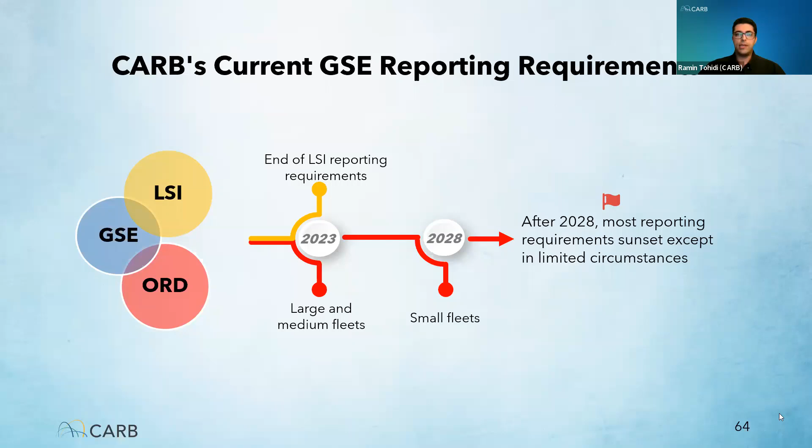There are two primary limitations in the current GSE reporting framework. First, there are no specific reporting requirements for GSE under either the ORD or LSI regulations, and these regulations do not apply to all equipment. For instance, electric equipment is only reported if necessary to meet a fleet's average emissions target, and businesses with 3 or fewer pieces of equipment or engines under 25 horsepower are exempt.

Second, annual operating hours are not required to be reported, so the current GSE emission inventory relies on limited data points for activity data. As for emission factors, we are working on updating them for the release and may incorporate the new portable emissions monitoring system, PEMS, approach.

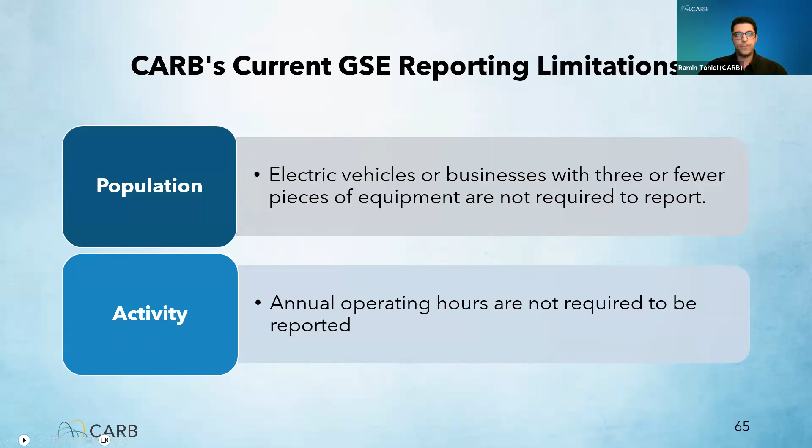The South Coast MOUs provide highly reliable data on GSE populations at 5 major airports, giving us a solid foundation for understanding GSE distribution across other regions. For other airports, our GSE population estimates rely on data from the DOORS system, which, while only moderately reliable, still provides valuable insights for our statewide analysis. As illustrated in the Venn diagram, there are some GSE types reported in MOUs that do not appear in the DOORS system, highlighting differences in data coverage.

To enhance our statewide GSE estimates, we applied the operational data to GSE ratio observed at South Coast airports, taking into account metrics like passenger traffic, freight volumes, and commercial aircraft operations. This approach allows us to better approximate GSE population at other airports using the reliable data from South Coast as a benchmark.

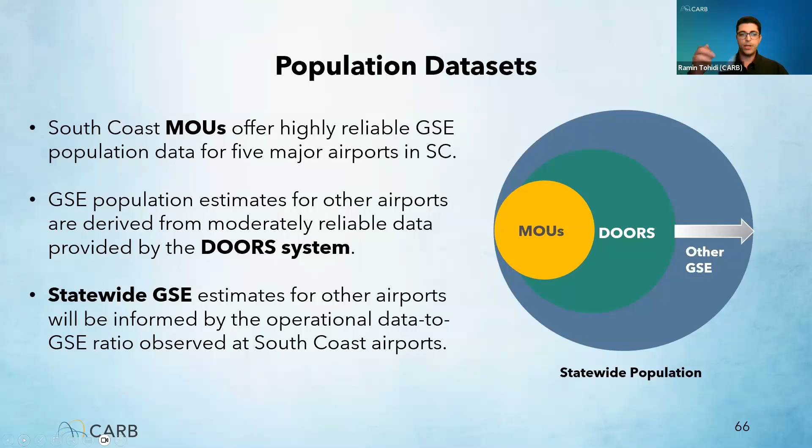This slide presents the preliminary estimates of a statewide GSE population, combining data from both DOORs and MOU sources. The total count is approximately 11,300 pieces of equipment. Compared to CARB's current model, we see an increase from

9,900 in 2023 calendar year. While these are still preliminary estimates, we believe the actual count could be even higher. Going forward, we will continue updating this data set to include all vehicle types, ensuring more accurate estimates of GSE as we gather additional data from other airports. Next slide.

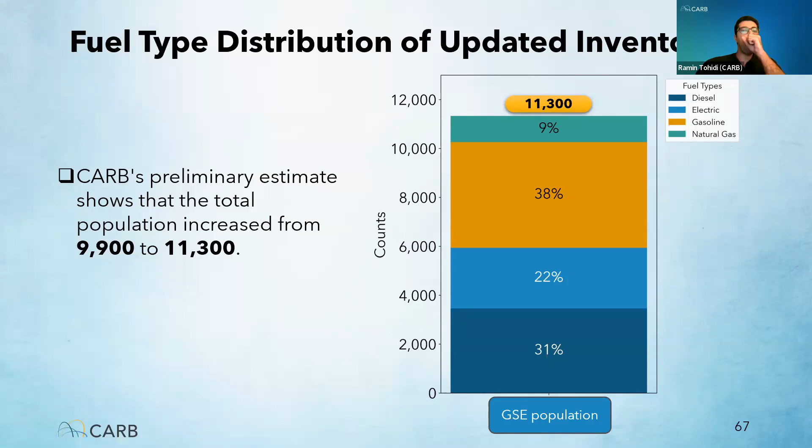This chart shows the fuel type distribution as a percentage across different vehicle types, sorted by electric vehicle adaptation. Gasoline and diesel remains the dominant fuel type in most categories, specifically for high-demand vehicles like cargo tractors. To provide more context, the absolute counts for each category are also displayed. It's promising to see some level of electric GSE adaptation in high-demand equipment, indicating potential for further transition to electric options. However, challenges persist for equipment requiring higher engine power.

CARB staff are actively evaluating the feasibility of zero-emission GSE penetration, while considering the limitations of certain categories. Next slide, please.

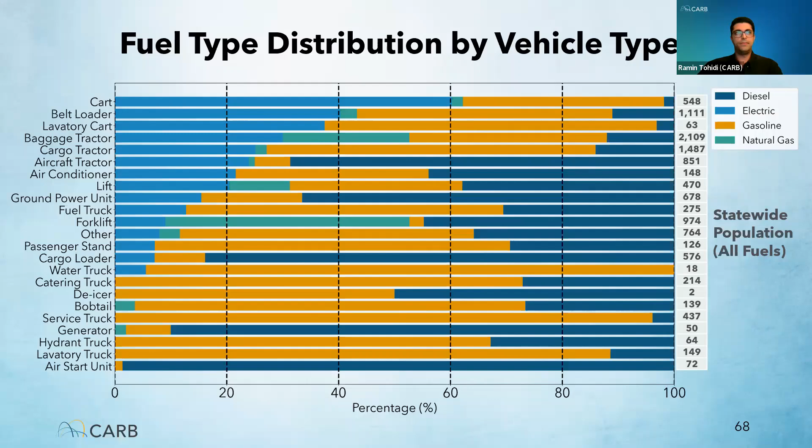CARB is conducting a voluntary GSE survey to enhance estimates of equipment, fuel use, and activity data. We are actively collaborating with airports and California Airports Council, or CAC, to finalize this survey. It will be distributed through airports and the CAC and will also be made available for download on our website by the end of December 2024.

I should mention that accurate data is critical for developing reliable estimates. Without your inputs, we may need to rely on assumptions that could potentially overestimate emissions. By participating, we can help ensure that the data reflects actual conditions and leads to more precise and effective policy decisions. Our goal is to complete the survey by February 2025, and we greatly appreciate your timely participation to help us achieve this. Next slide, please.

For the survey, we have outlined two scenarios based on your situation. If your equipment is registered in DOORS with an equipment identification number, EIN, all you need to do is enter data such as annual operating hours and fuel usage details, including the type and the volume. For equipment that isn't registered in DOORS, like electric vehicles or new additions to your fleet running on gasoline or diesel, please provide relevant vehicle data and activity metrics.

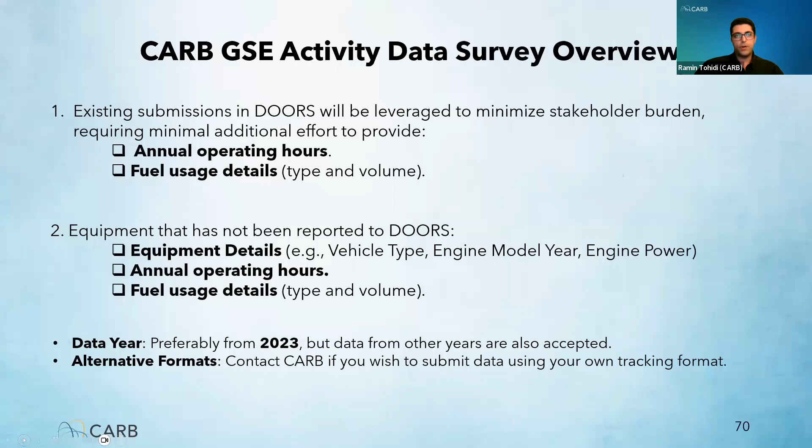I'll hand it over to Dr. Chen now to cover our future plans and next steps. Dr. Chen, over to you. Thank you, Ramin.

Again, one of the major purposes of today's workshop is to seek feedback. We would appreciate if stakeholders can share any data sources that can help with improving emissions inventory, cost analysis, feasibility analysis, etc. We welcome feedback on the proposed concepts and alternatives to proposed concepts. More specifically, in order to inform cost, economic, and other rulemaking analysis, such as the Standardized Regulatory Impact Assessment (SRIA), we request alternatives that yield the same or greater benefits than proposed regulatory concepts, or do not yield, or are less likely to yield the same level of benefits than the proposed regulatory concepts.